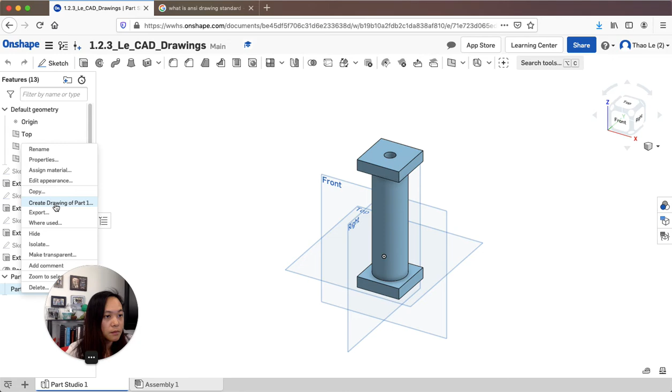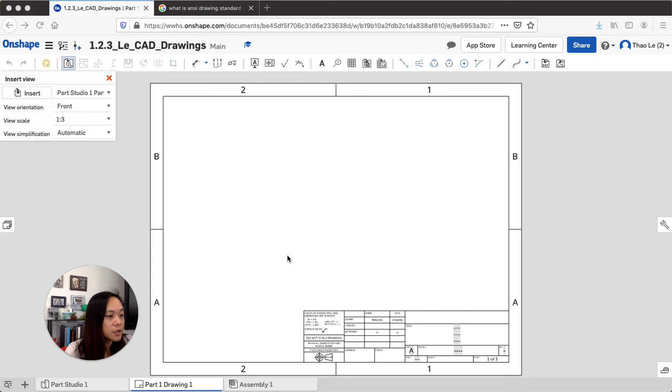And then you can get this blank drawing sheet in here. So what you want to do is insert your part. So I'm going to click the insert button. And it's going to have that part that you created, so it should be part 1. So I'm going to click on that. Then don't click anything, you should be able to move it around.

So this is always your front view. So if you were staring at it at the front, so you want to put that here. Okay, if you click it.

Okay, to project it, just highlight over it like so. And then if you move it up, okay, I'm not clicking anything. I'm going to move it up, so this will be the top view. So from the top looking down, I'm going to click.

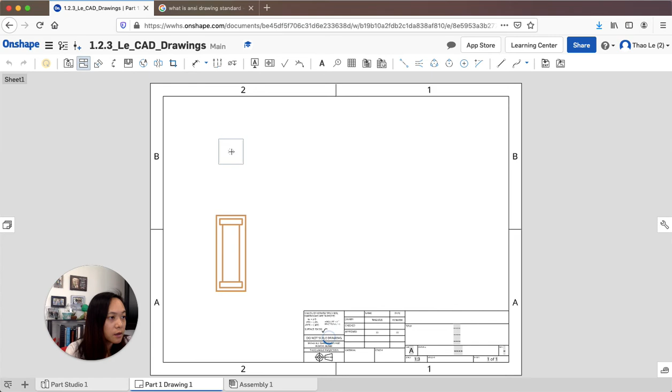And then if I want to go from here to the right, that would be my right view, so click. So this one I had to click and then click over, and that's the right view. So you can see the front view and the right view are the same.

So then I want my isometric view, so I'm going to click this again. So you always want to go from, and I'm going to move it up, so that would be my isometric view. So I'm going to put that on, let's put that in this corner right here.

Okay. Nope, I don't want to move. Escape. Let's see, can I move this?

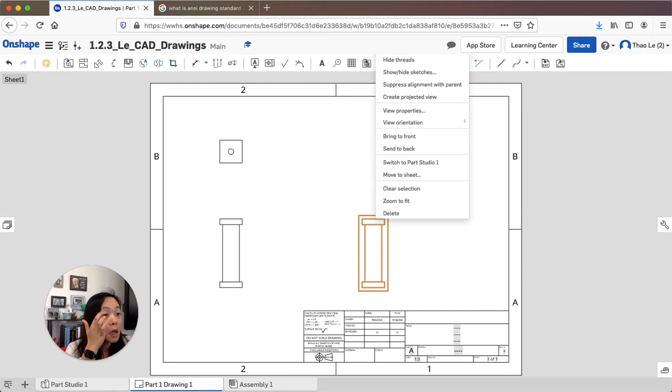Okay, so to move it, so to make sure this lines up with this, you click on the right mouse and the left mouse at the same time. So you right click and left click at the same time. So let me do that and show you, and then you can move it. You can move it around, so that's how I move it.

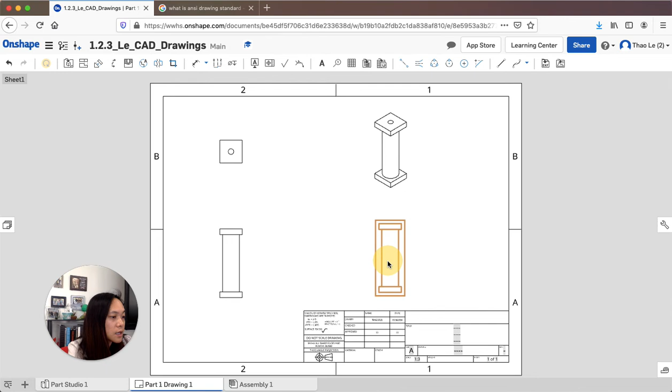I'm going to move it so it fits here. Okay, so same thing, if I want to move this over here, I can, so I'm clicking down on the mouse and on the left click and the right click. So as you can see, this, they are parallel to each other. So if I move this up a little bit, this is going to follow. Same thing if I were to move this down. Okay, so that's how I would get that here.

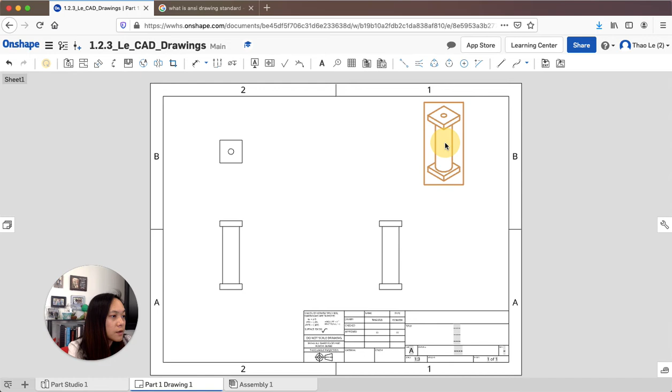Okay, so then now I'm going to dimension this. Actually, I'm going to move this back over here so I have a little bit more room. So I'm going to dimension this so that it's actually, I'm going to move this. Oops, oops. Okay, and then it moves there as well. Okay, and then it kind of looks nice together. So again, left and right click will move it left and right, and it should all move because it's a projection.

So I got my front, top, and right. So in this part right here, I'm going to do the length. Okay, so I'm going to dimension the length. So I'm going to go here to dimension. Let's go from here to here. Okay, so that's going to be 2 inches.

And then I'm going to go from, let's see, from here, let's do from here to here. So that's going to be, let's see, 1.5. Okay, and that's really all that I need for my dimension here. You can pretty much figure out the rest of this. If this is 2 and this is 1.5, the distance between here and here is 0.25 and 0.25. So I don't need any more dimension after that.

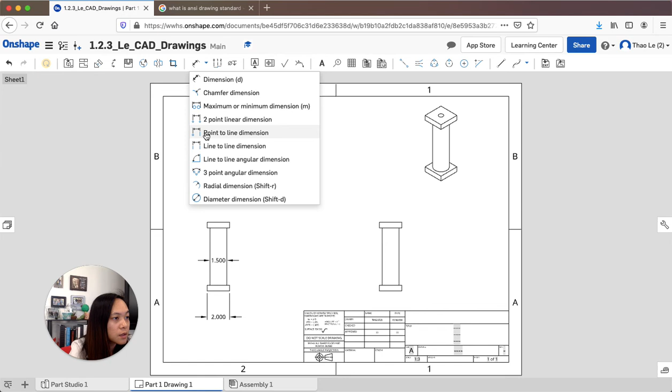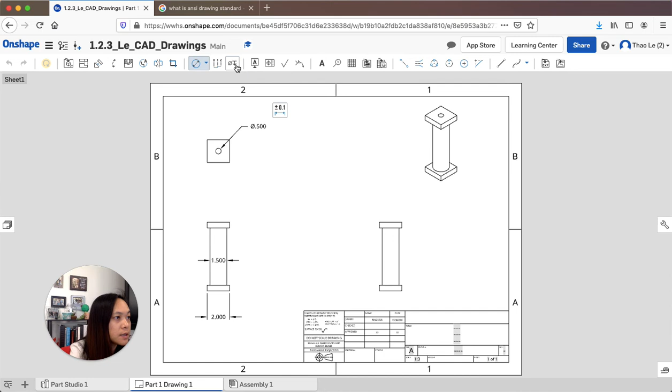To dimension the diameter, I'm going to click on diameter dimension. I need to dimension this part right here, and then it calls it out - you want to move it to the right side so you can see that. I'm going to go up and down as well, since this only has left and right, so I want to dimension it up and down.

Like I said, don't over dimension things. So if you move it in, the arrow goes in, like so. Now I have this is 2, this is 0.5, this is 1.5, this is 2.0.

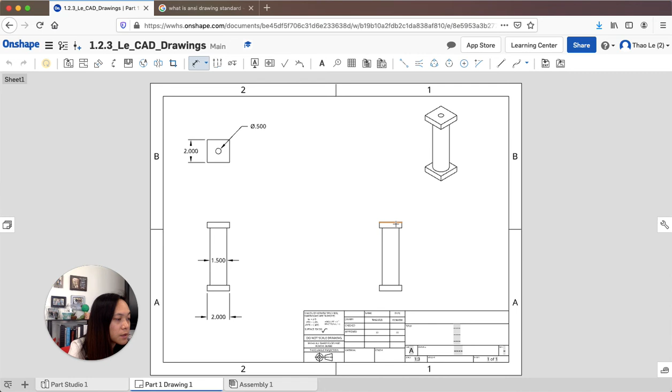Now I want to do from the top to the bottom. Let's dimension this from the top to the bottom. Basically what you're doing is if someone were to take this, they know exactly how to create your drawing.

So I click, then move in so the number's in between. We'll move this as well, and then I need to go from here to here as well - top to bottom. That shows me that between here and here is 6, between here and here is 5. If I were to look at this drawing, I would know exactly.

Let me see if I can fix this. Because this is so tiny right here, if I hover over it, I can't move the arrows inward, but I can move it out. It's the professional thing to do to keep the units inside between the arrows, like this and like that. But because this is so small, you weren't able to do that.

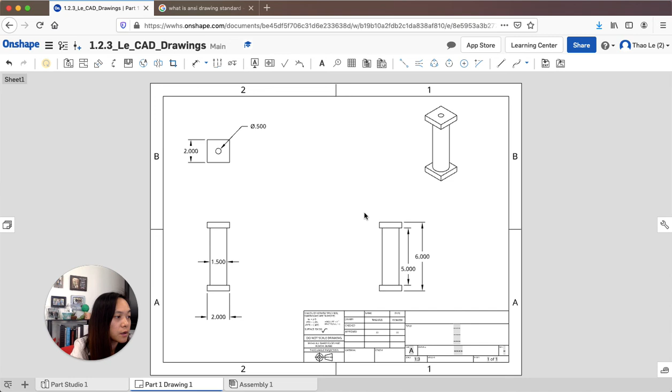A really important feature I want to show you is this call-out view, this one right here. It's a detail view - it lets you see things that are really small. Let's say you want to do here - if you hover over this and have something special about this corner right here, you want to do a detail view.

So you click on it, and kind of zoom in on it. That's going to let you go out here and see this part, and you can see it a little bit bigger in a detail view as well, and then you can edit your detail. The detail you can edit lets you see how small it is and so on, and then it zooms it out and in.

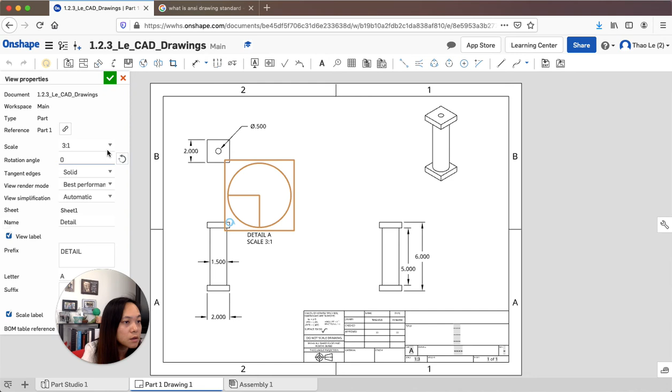For example, you can do 1 to 3, or 1 to 10. Actually it needs to be the other way, let's see - it needs to be 4 to 1. You can see it really big, that's really big. 3 to 1, it's quite big. Let's do just 2 to 1, and then it zooms out.

Let's say there's something special about this box, you can do a little detail view. After you detail the view, zoom in or zoom out, whatever it is, you can add a note next to it as well. Let's say in this note you want to put something special about this - let's say this is the corner.

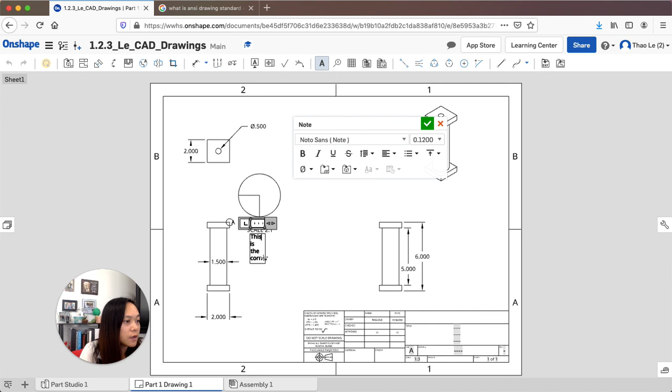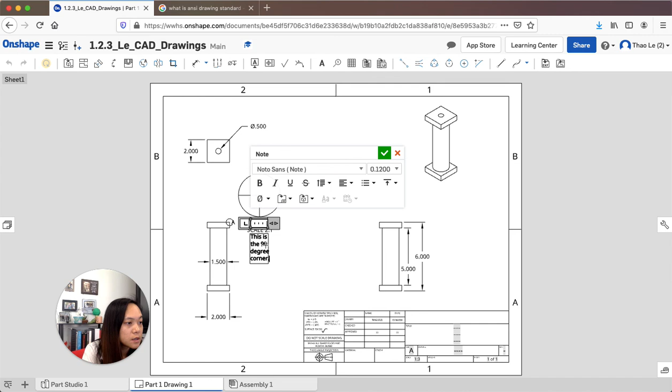This is where you can get the special instructions, like this is the corner, or I'll have instructions like this is the 90 degree corner. Let me edit - right click on it, I'm going to edit it. We'll say this is the 90 degree corner, because it's a right angle. So then you can do that.

Okay, last but not least, over here, I'm going to zoom in so you can see it as well.

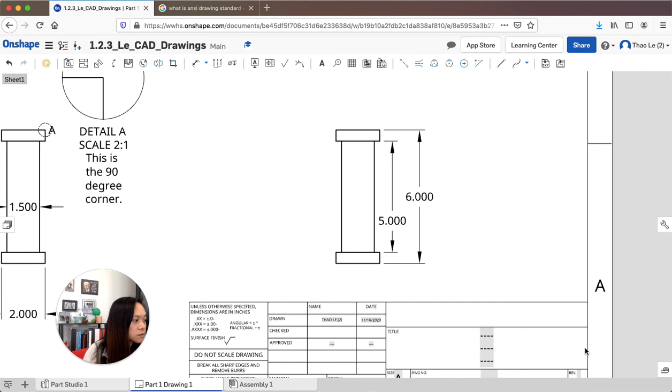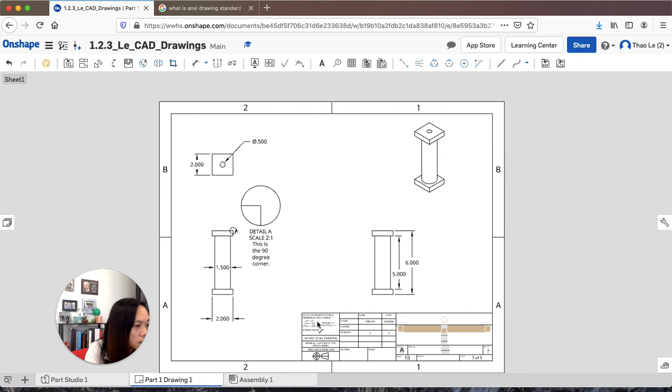On this part right here, you're going to put the date - today's date. We should already have the name populated, that's my name here. And then these are all the other things you should have on here as well, so I think this is the title. You're going to type the title in here, and the title would be '1.2.3 drawings' and all the other stuff. And that's it - that's how you do it.